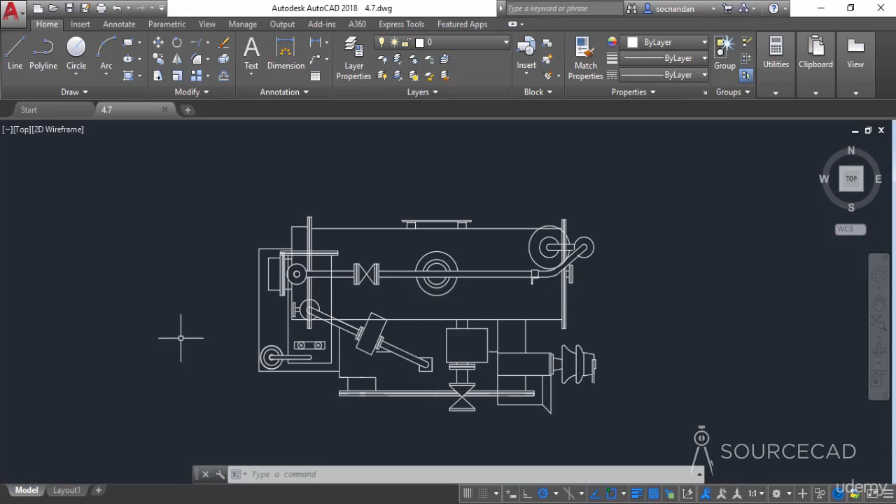In this drawing there may be certain geometries which could be overlapping. So I'll zoom into this area. Now if you notice clearly, we have some overlapping objects here, some of them overlapping on each other.

In order to clearly identify that, you can take help of selection cycling. Click on this selection cycling option on the status bar to turn it on. If you're not able to see this option, click on the customization and enable the selection cycling option, and make sure it's active.

Once it is active, go to the status bar, turn it on, and move back to the drawing area. Whenever an overlapping object is found in the drawing, you will see this overlapping square icon right beside the cursor. Simply click and you'll see a list of all the overlapping objects.

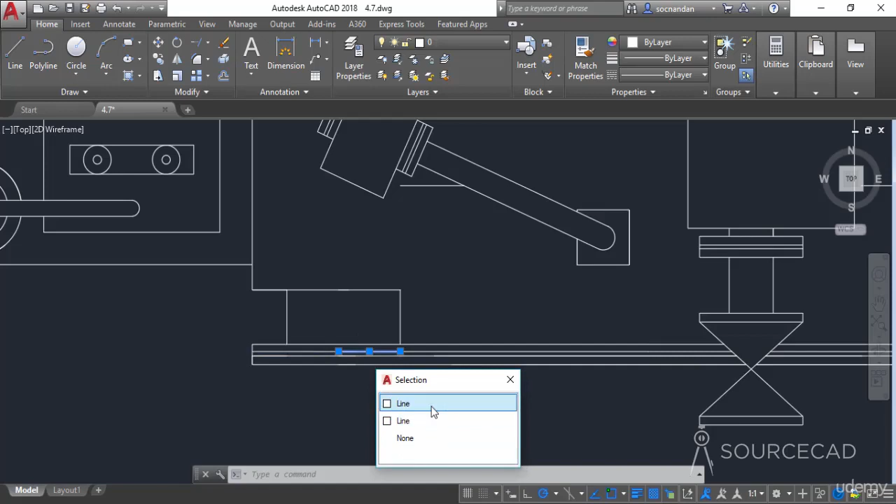You can move between the first and second object, and if the list has more objects, you can select those too, with a preview visible in the drawing area. You can select the objects and either erase them or perform other modifications.

In this case, I'll simply erase it, and now we can join both of these endpoints. I'll use the line tool and join these two endpoints. Now we have a clean geometry here.

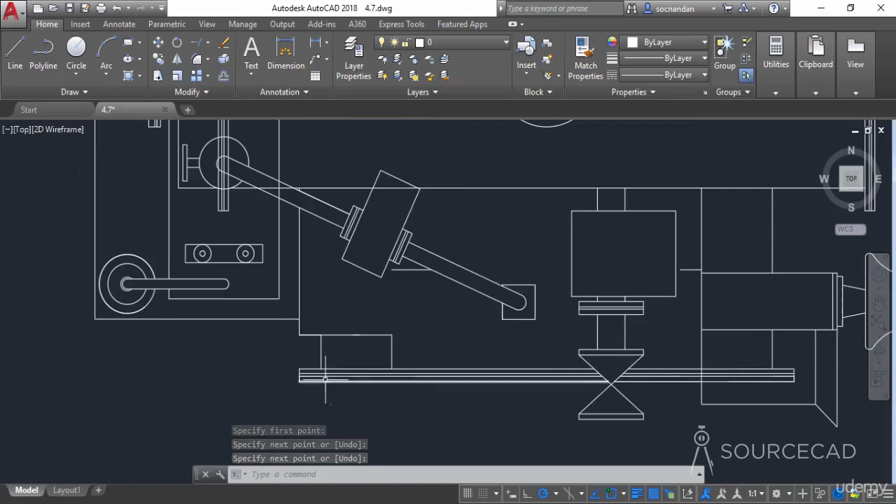Similarly, let's move to this part of the drawing, and here we have this circle. When I move my cursor to this circle, there's no overlapping icon, but when I move it to this other circle, we have this overlapping icon, which indicates that we have two or more circles on the same center.

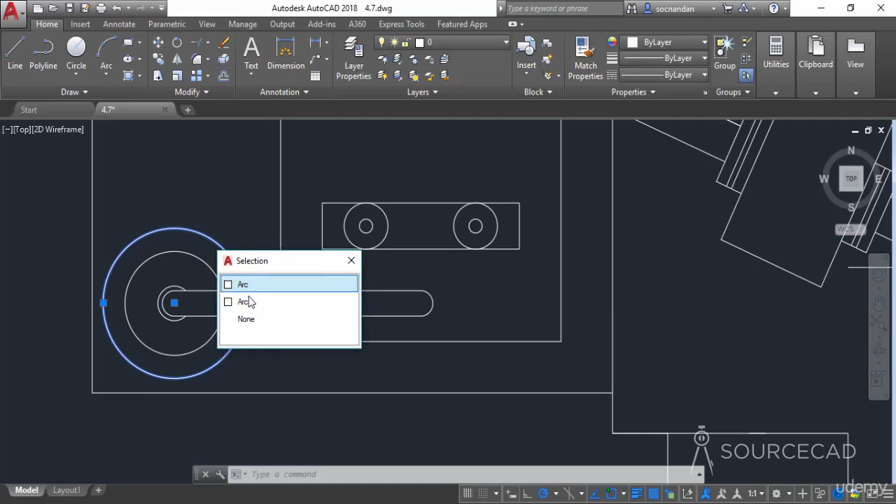Let's click here, and we obviously have these two arcs of the circles. I'll select the second one, which is not the full arc and is completely redundant geometry that's not required. Let's erase it, and here we have a clean geometry.

So in this way you can use selection cycling to make selections of overlapping objects. Now let's have a look at other status bar options.

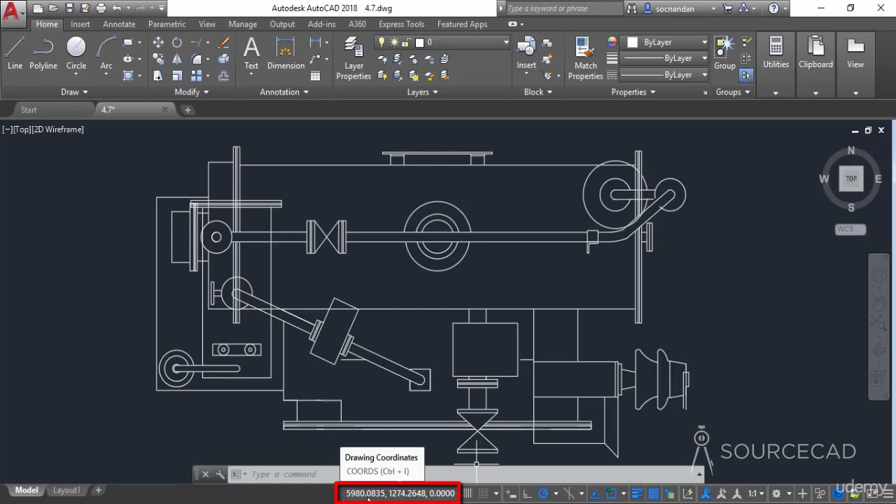I'll go to this customization and select the coordinates option. As soon as you activate it, you'll see three coordinates on the status bar: the x, y, and z coordinate values, and these will change with the movement of your cursor, updating in real time as you move it around the drawing area.

In this way you can make a clever approximation of the coordinates simply by moving your cursor to that area. Now let's look at the next option, which is units.

I'll go to the customization and activate the units status bar option, and turn off the coordinates. When you turn on units, you'll see this status bar showing the current display unit, which is decimal in this case. So right now all dimensions will be shown in decimal units, meaning whatever geometry you make will be shown as decimals.

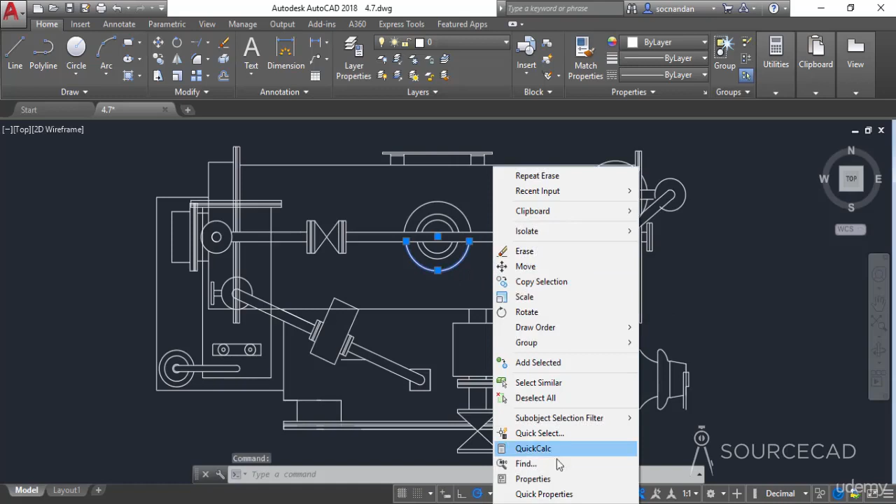I'll check some properties of these objects. I'll select this circle, right click, and go to properties. Let's have a look at this property palette. Here we have some properties related to this arc or geometry.

For example, we have the radius as 120.188, the start angle in degrees, the area in square units, and the total arc length. All of these values are currently shown as decimal values.

Now let's press escape and change this from decimal to architectural. Let's click on this arc again and look at these properties, and now they are shown as architectural values.

Obviously there's no change in the angles, it's still shown as decimal. And here we have the arc length, area, and all the remaining values.

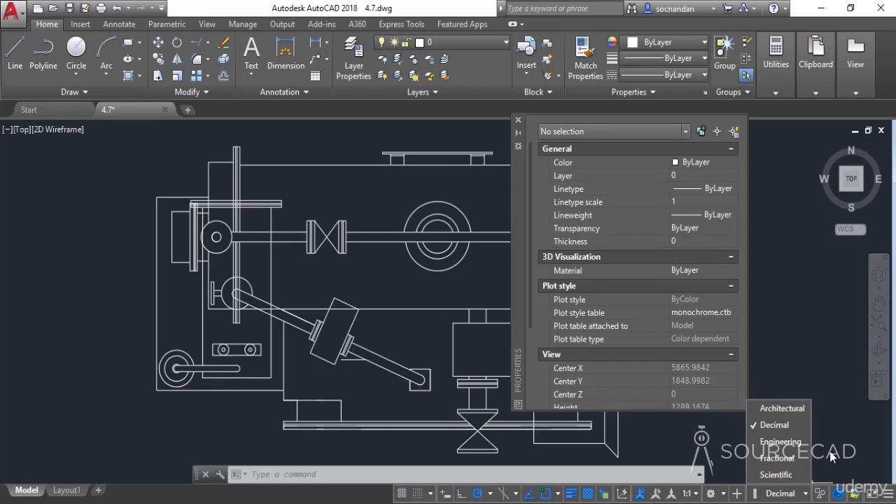In this way you can toggle between decimal, architectural, or other options like engineering, fractional, or scientific, and view the values in that unit format. This doesn't change the unit of your actual drawing, it simply changes the format in which the unit is displayed. So now let's close this properties palette.

I'll go to the customization and deactivate the units option, and click on this quick properties option. Using this quick properties option, you can bring up a small property palette for every object.

Let's say we want the property palette for all of these objects which we select. Simply click on quick properties to activate the option. Now click on any object and this small property palette with some of the important, frequently used properties will get listed here, for example the radius, the coordinates of the center point, layer, and other information.

You will learn more about this property palette later on in the upcoming modules. So let's close it once again, deactivate the quick properties option, and press escape.

So that was all about the selection cycling and other status bar options, which are really helpful and can be used according to your preferences to make your drawing workflow easier.